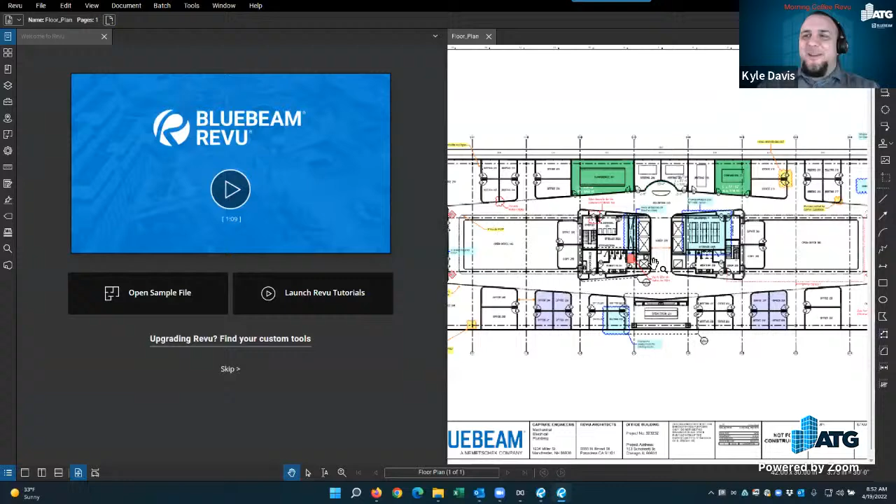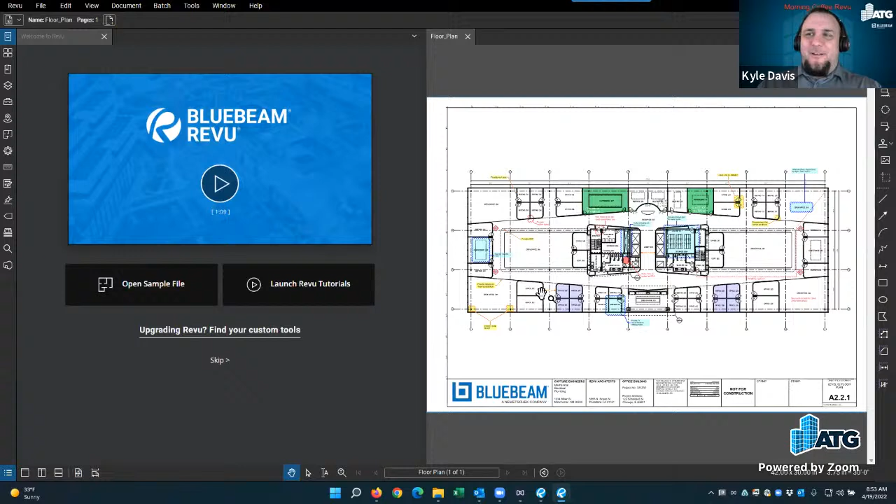It gives me some things about printing and Revit stuff. I also use this for showing how to create spaces in Revu, and when I export it out and things like that. That's pretty cool—where can you get it right here?

Actually, if you hit Help, Welcome to Revu—so even if I have that closed out, press F12, and you get this. Oh hey, I didn't notice that. Good eye, I didn't notice that. F12, there we go.

All right, the Revu desktop shortcut—if you want your desktop shortcut right there.

However, if you're like me, if you look at my desktop here, I got nothing. How do you do that? That's amazing, I just have my recycle bin. So clean, that desktop. Yeah, I actually do a lot of demos, and I do have files off of my other screen, but it's only three. So I need to take some notes from you, Kyle, and fix my screen over here. I put everything on my external hard drive and have shortcuts to it from my desktop. I like that—David Clark, clean desktops are beautiful.

Then there's the stapler desktop shortcut, that's if you want to pop up the stapler, which otherwise is in the menus. If I could spell correctly—I haven't typed it in forever, so it doesn't even remember it's there. Right, so the Bluebeam stapler—all apps, Bluebeam, and then there's the Bluebeam stapler. That allows you to open up and convert things to PDF or combine files, things like that.

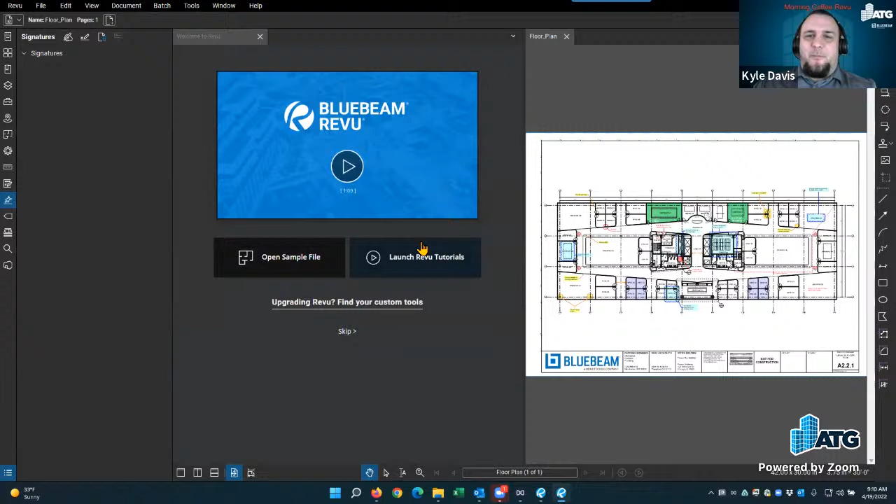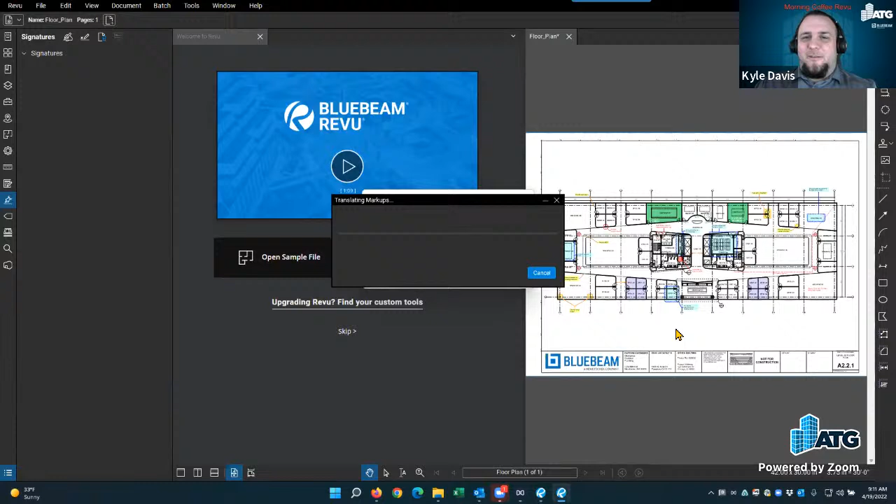What he did here is if you click document and you go down to translate markups, you get the ability to do that. And as Doug just mentioned, powered by Google. Look at that. So I can come in here and let's say I want to translate to Spanish. And so now I have the ability to look in here, all these markups, and you can get them translated into that language. Now, I'm actually going to cancel it because I don't know how long that's going to take. But there you go. Cool, though.

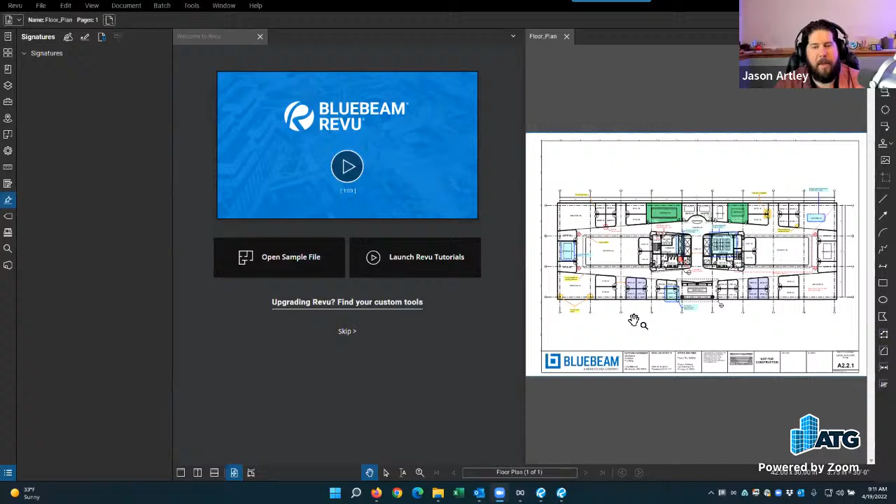Oh, so Doug had a set in Cantonese once. So yeah, that would be fun to play with, and it adds to the global accessibility too, right? Cool. We should play with that sometime. See, we're always learning something new here at the Morning Coffee Revu. I know. Or to mess with coworkers, even better, David. Yes.

All right. So again, these are just plugins. These are only available in CAD and Extreme versions. So if you have standard, you won't have the plugins available. Interesting that the LT is on there. Yes, I was wondering that too in regards to AutoCAD LT. Now, Revit LT is not listed here, because Revit LT never supported third-party plugins. AutoCAD LT was also supposed to never support plugins, but according to this, you can put it in there.

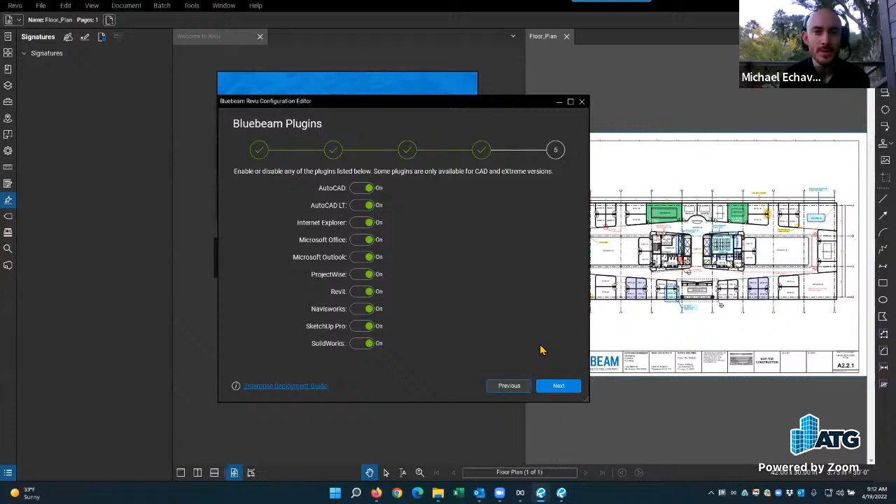So I don't have AutoCAD LT installed, but I do have a license for it. I want to test that out because I've never had AutoCAD LT be able to accept add-ins. So if Bluebeam can do it, cool. Yeah, and it could be that they got a special exemption in that it's a PDF writer. Well, and AutoCAD doesn't go into the add-ins. Remember, it just goes to options. So maybe that's why. I think it's an output tab. I think that's what it is in AutoCAD for Bluebeam, output.

Okay. So next over, and then you have the output deployment folder. So this is where, back from the original location, you can change it later. So two locations. Then there is the skip pending reboots. This is if the installer detects a pending reboot, enable this option to skip it.

So basically, in Windows, a lot of times if you install Windows updates and you haven't rebooted yet, those are still pending updates. So Windows says, hey, I need to do something. So sometimes it prevents an installer from continuing because it already has these other things. So this lets it skip it, install it, and then you need to reboot afterward to not only take care of your other updates, but also for Revu to finish too.

And then the other big one, silent install. Do I want to see a dialog box that gives me all these buttons I have to click next on, or just do it? So silent install is the option to say, go ahead and install it. You still get a dialog box, but it just shows you a progress bar. So it shows you what's going on versus it popping up and you having to say next a couple of times.

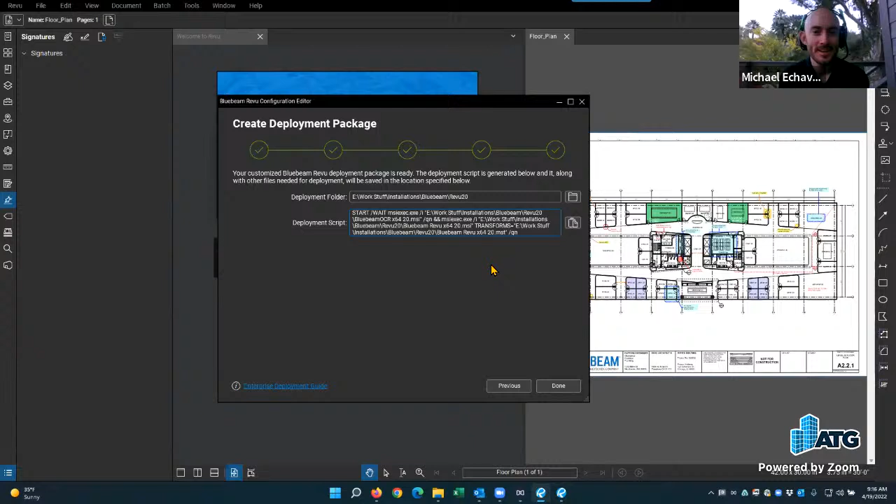And by the way, before this deployment package came out, you used to have to do this manually. Yes. So this is a lot easier. This has everything done for you. So if you're one of those folks that hasn't done any script lines for deployment packages, this is the best way to go about it. You don't have to worry about messing a 0 or a 1 up, because we've all been there before, and it will preset everything for you.

Yeah, when I first got into Bluebeam software, working on the support side, we had to go in and edit the MSI. So we had to have a tool that let us edit the MSI and change all the keys in there: here's the serial number, here's the product key, here's where I want plugins. And just as you stated, you could easily miss it, oops, should have put a 1 here and I put a 0 and didn't see it. And then you have to go back through and do it again. So, make life easier on IT.

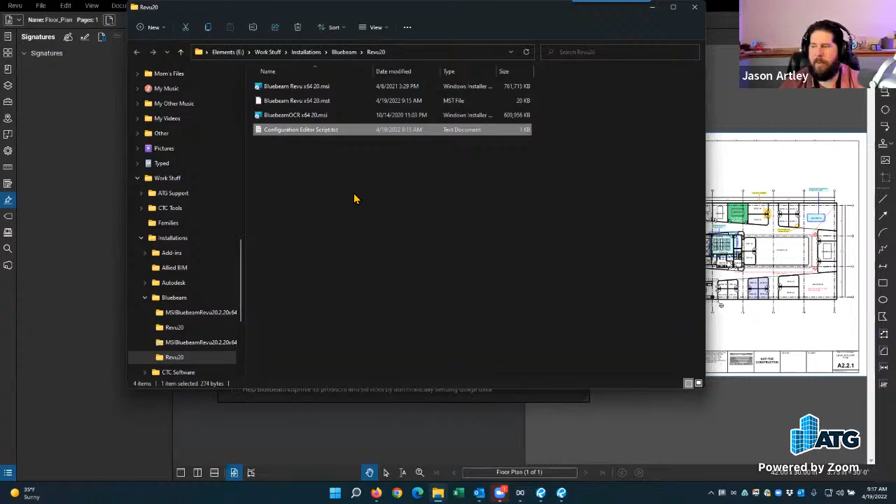Ooh, so Michael's suggesting it writes the script out. You just need to change the file extension to a BAT to make it a batch file. Right there. So when I hit done, it took me to that folder, and then there's the file right there. And it's just simply, by default, it creates it as just a text file. But if I double click on it, all it's going to do is open Notepad.

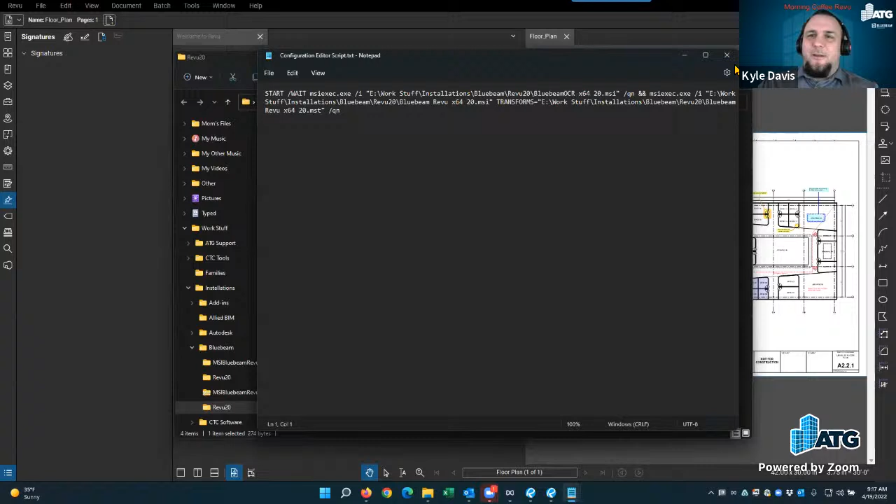So just as Michael said there, if I right click on this and say rename, I just need to change this to a .bat file and say yes to convert it. And then now I can use that as my install. If I double click on it, it's going to start executing that command.

Or you can put this in a deployment software. I can say SCCM or PDQ or any other deployment software, as long as they support your BAT files. You can just say, point here, grab this file, go. And that's it. There shouldn't be too many other edits because this editor already did it for me.

And we're not done yet, because all we set up there was preferences. Most folks are probably wondering, because we know more of the front end of Bluebeam Revu, which is profiles. What about tool sets? What about all of those other items like line styles? How do we add those, Kyle? Yes, so let's go back to the configurator, and we now have other options in here, such as deploy extensions. So here with the deploy extensions, we can push out custom profiles, tool sets, and more.

I'd like to think it should be like a commercial here. Wait, there's more. And that's not all.

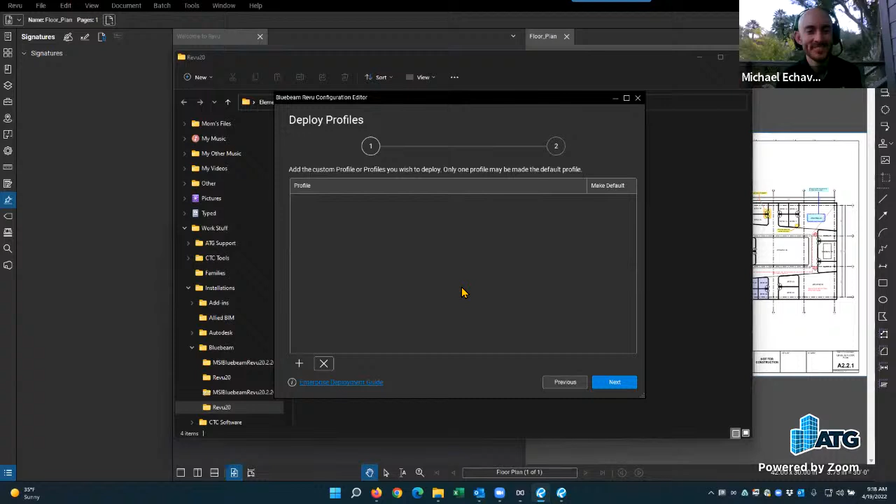So here is where you can specify what other things that you want to deploy, such as profiles. So here I can say add, and then I can specify my BPX file. So I can navigate to where I have that saved on the server or wherever it is, and I could put that in there. And then I could specify as many as I want, and then over here I can say which one is defaulted. So by default, make this one the primary, and the other ones are just in there available to use, but they're not the default. And as up here, only one profile could be default. Never heard of the ability to make multiple profiles defaults in any software.

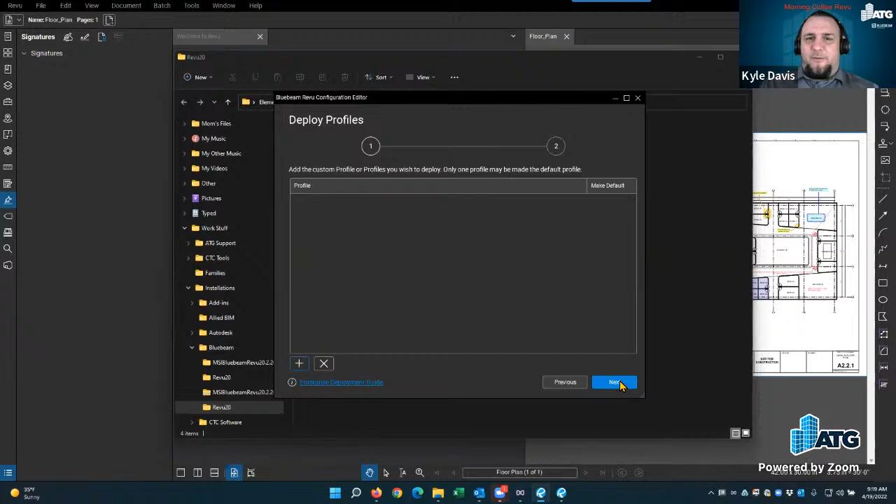But if you're not doing deployments of profiles, or even if you are, if I go next, now I can go to specify tool sets, hatch patterns, and line styles. So again, I can come in here and hit the plus sign, and I can browse to my tool sets, hatch patterns, and line styles. And you do have to hit the drop down here and select which one you're trying to browse to, because they are different extensions, BTX, BHX, and BLX. So you have to do that, and there's not one in here that says just hit all 3 of those. So you have to make sure you're specifying which one there.

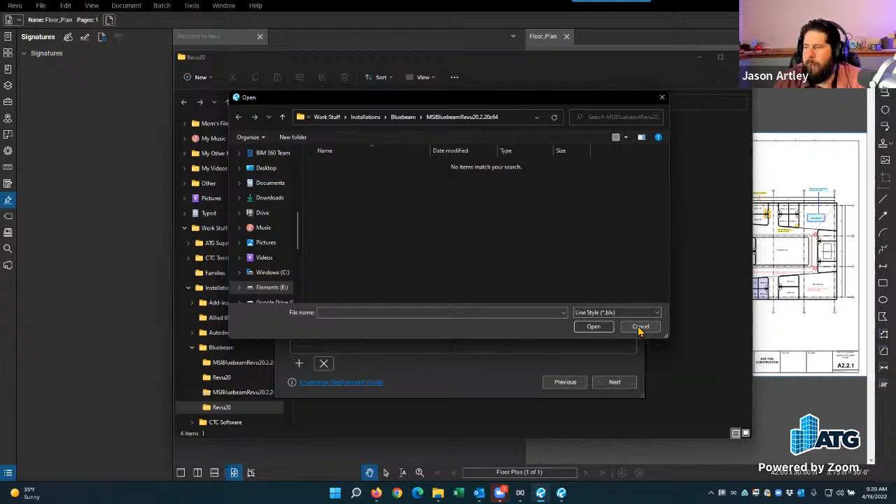Ooh, all right, two good comments at the same time. If you export your tool sets in your profile, then add tool sets in the deployment, will you get them in there twice? No, it wouldn't get them in there twice. It would append. It would take the tool chest, I believe, of the last executed task, and I believe the last executed task is here. So I believe it does profile first and then the tool sets. So if you had the tool chest in your profile, then you did your tool chest, it wouldn't put them twice. Oh, it has put them in there twice for you.

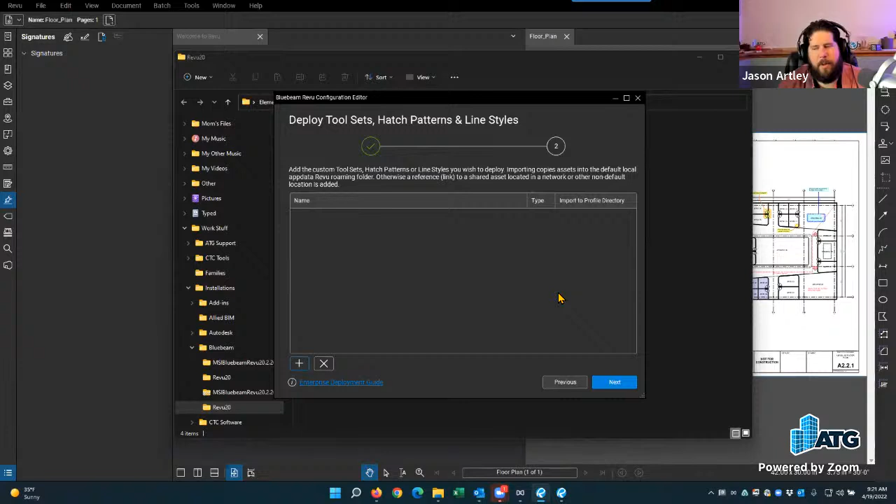That was more of a statement than a question. Interesting. Yeah, I didn't think it would do that, because typically it will ask you to overwrite or not overwrite when adding the same one in. And it could be a bug in the deployment that it's going to do it twice. If I manually double click on a tool set, if it knows it's there, it's just going to replace it with what I have. But the deployment, maybe it's built slightly different where it is putting it there twice.

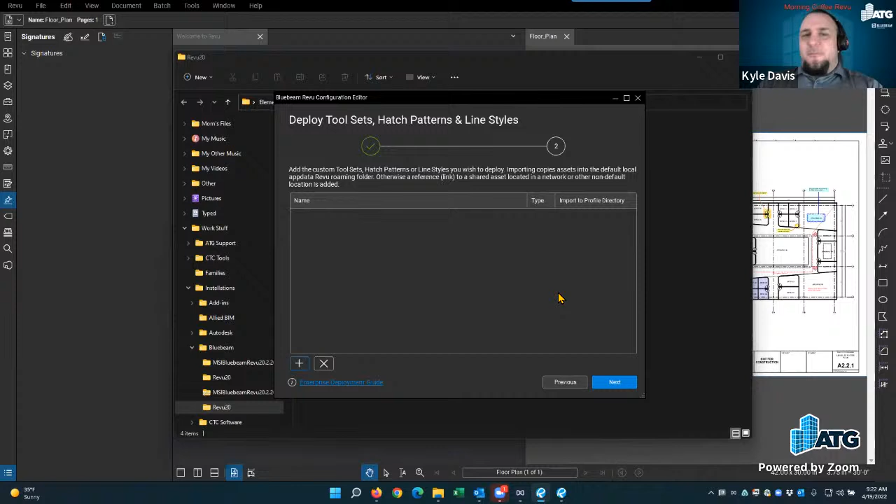So in those scenarios, I can get that over to Bluebeam if I can reproduce it, and say, hey, this doesn't work this way. Maybe we can change that feature. But as for now, don't add your tool chest in the deployment if it's in your profile. Yep, because automatically it'll come with your profile, as well as all of your other items too, as long as you're selecting the attached dependencies. So be aware of that.

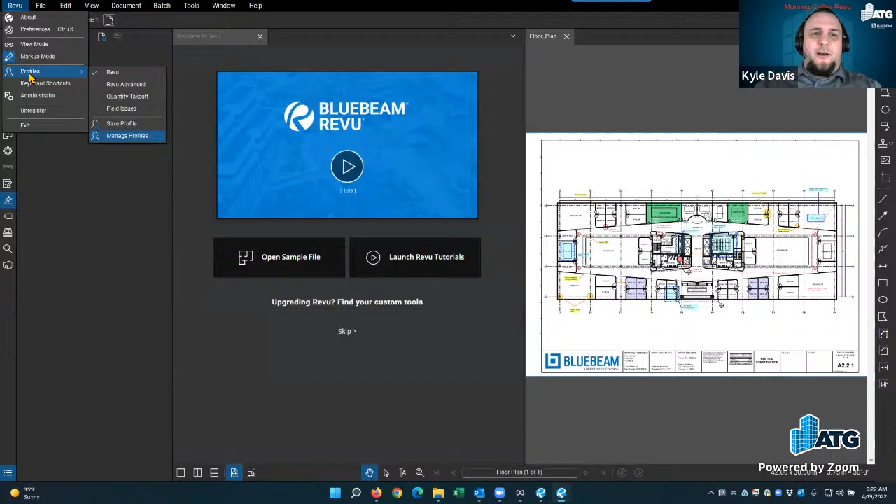Yes. So if you export your profile, if I go to the profiles and I manage these, it's that checkbox right there of include dependencies. So if that is checked and I export it, the tool sets that are associated with it will get exported as well. If you didn't export those, then that would be in the deployment here where you can specify those as a separate line item to install.

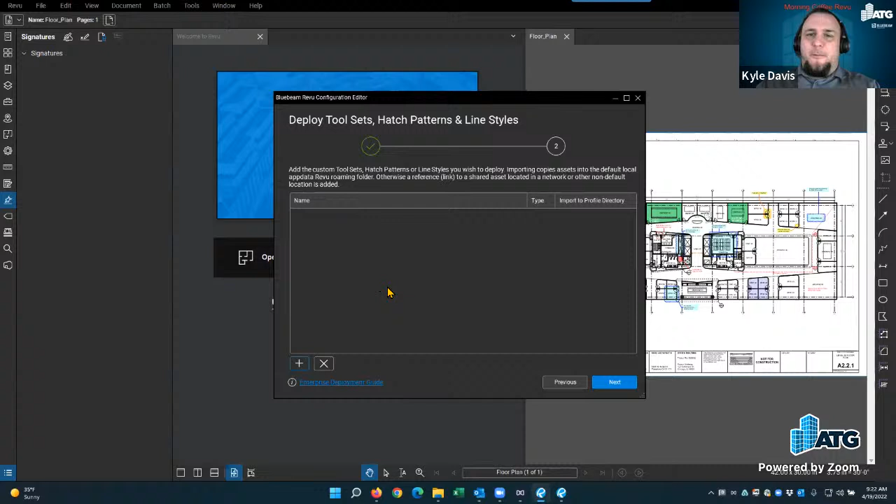So, okay, two other questions, one from David. Can you have it prompt to select a profile when it's launched? So like when Bluebeam launches, when you open up Revu in the morning, have it prompt what profile you want to start with? I've never seen any kind of setting like that. I know just in here, this is where you make default. I've never looked into having one where it pops up and says which profile you want to use.

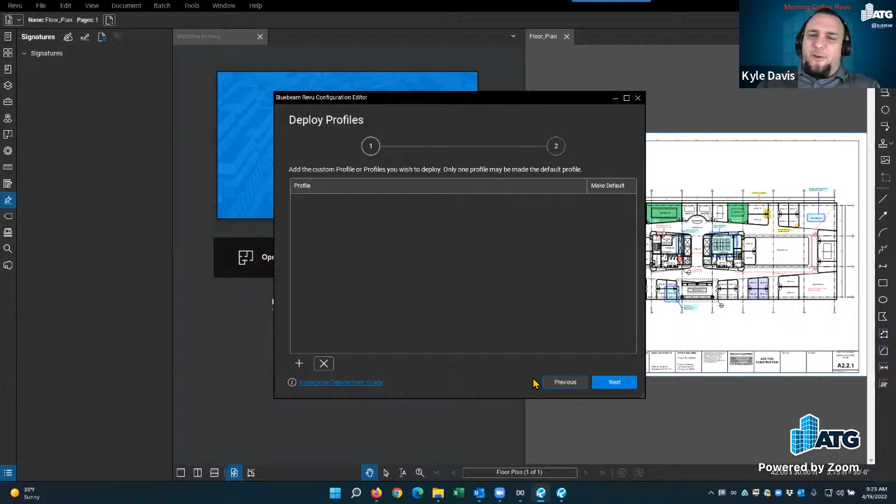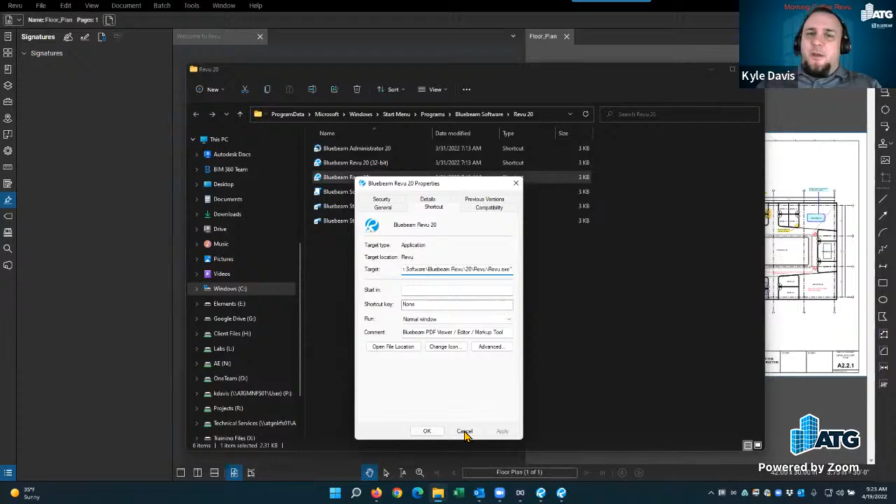I don't even know if it could be done in the shortcut as well, like AutoCAD. I know you can. Yeah, I was just thinking of the shortcut; you can do that, but I don't think Revu has that feature. But definitely, I can look into something like that, because if I go to the properties of this, let's see, go to properties. Yeah, all this does is just execute the Revu exe. So it doesn't have any kind of switch in there. So that would be a good question. I could definitely look into that one. I don't know it.

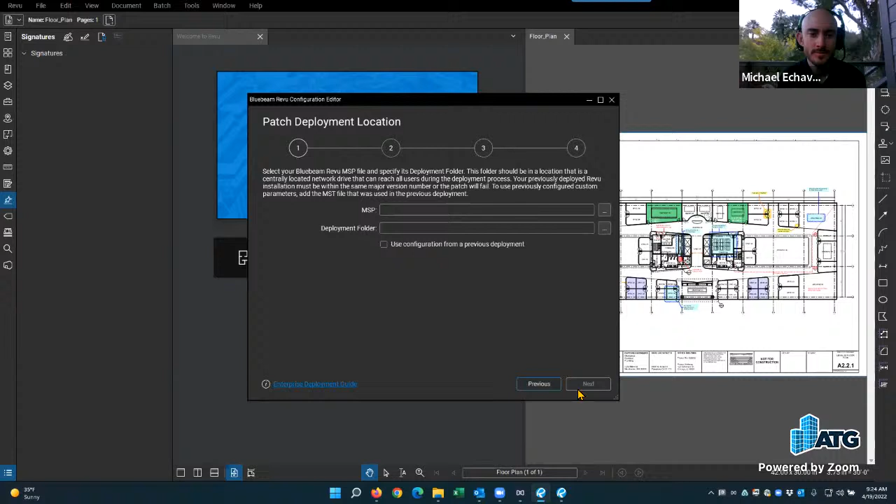Okay, another question. What happens if you update a tool set? So if you've already done your deployment and you update a tool set after the deployment, can you run this thing just to give everybody the new tools that have been set up in a tool set? That's a good question. You could run it as a patch if you wanted, but I think the best way would probably be just to send it out, to be honest. Yeah, typically what I see is to just send them the file format, and then they double click on it and it imports it and overwrites their profile and/or tool sets.

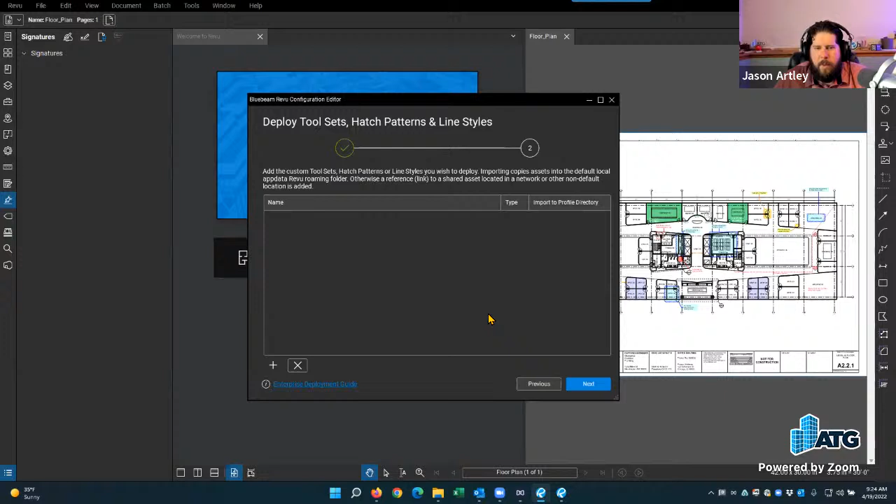Ooh, that'd be a decent trick. When we were talking earlier about having Revu open to a default PDF, you could have your company dashboard that would have your new tool set right there to update. That is true. You could attach a PDF. Oops, sorry, Michael. No, you're good. Yeah, you can attach a PDF, and you could create a digital dashboard in Studio Projects, and then Projects is going to be your live location of where you add things, and it links directly to that location.

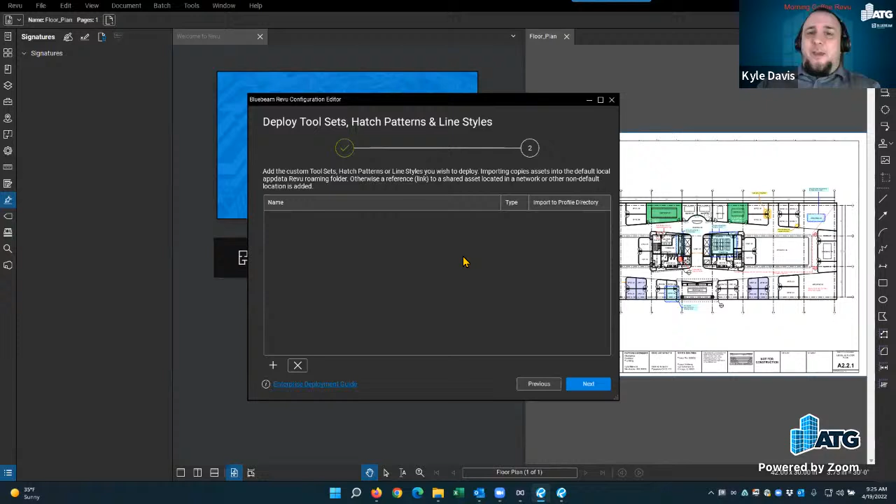Yeah, and in that PDF you can edit it to say tool chest updated on this date, click this to update yours, and so the users can click on that link, pop up their new tool sets, and import it. So that's a really easy, good topic for folks who have iPads too.

Yeah, and here's the question about statuses. So there is currently no exportable way for custom statuses unless it's in the profile. So you'd have to update the entire profile. So yes, statuses come with the profile as long as you have said save to profile, because by default it saves to the PDF. And we found this out too. I always thought that you could set a profile and it would save it so you can add it in a session, but it's actually just the PDF that saves those custom statuses in order for you to get them into a Studio Session so everyone has the same one.

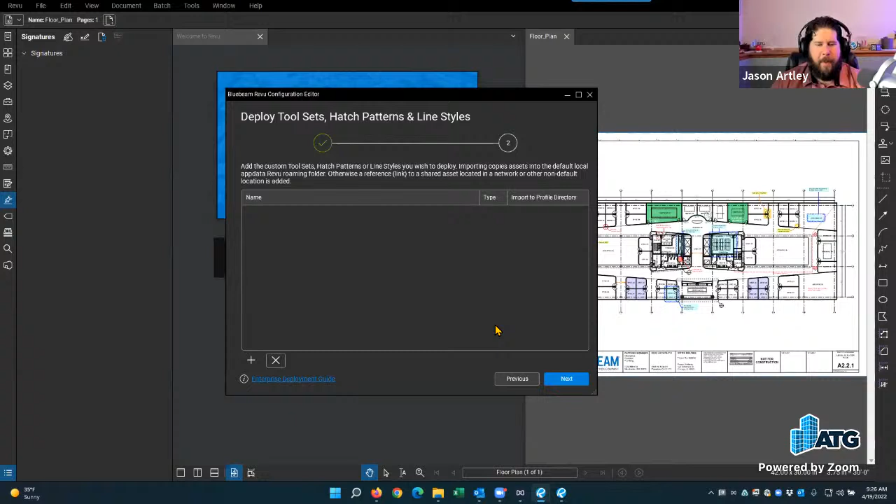So, all right, I haven't done much here, but this is where you're just going to specify the profile folder location: default or designate new profile directory. If you turn this off, it's going to keep whatever was there and import the profile there, or if you turn it on, it's going to specify a designated new profile directory. And then silent import, so it's going to import those elements silently. So let's specify my folder here again, even though I haven't done anything, and then I just say create.

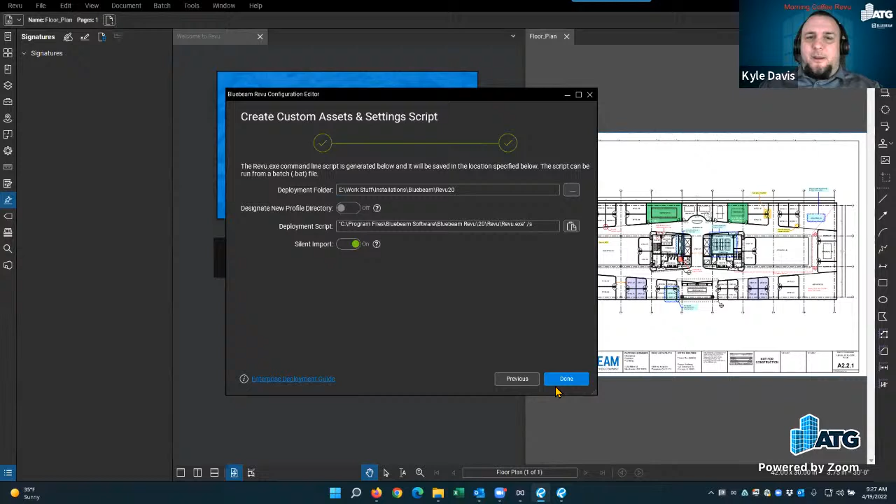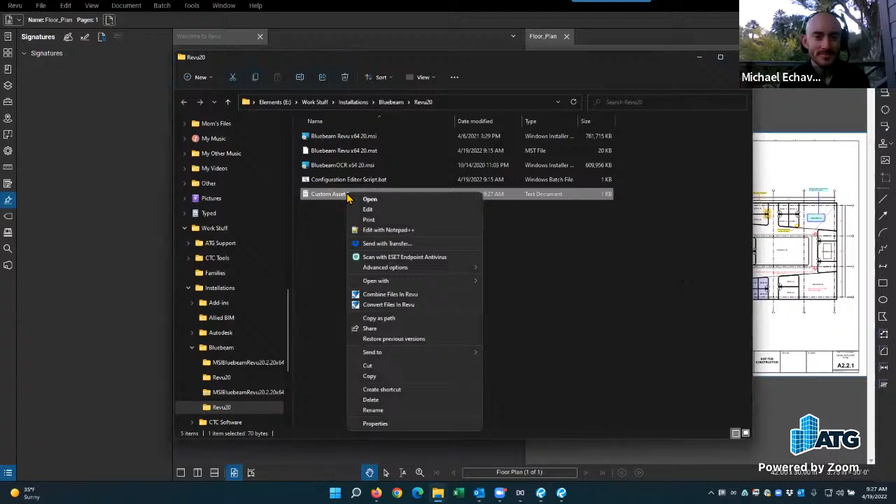And so now it's going to have that other deployment here of just simply custom assets. So now you can have the configuration editor and then there's the custom assets. So this could be done separately. It doesn't have to be done at the same time. You could do these one at a time. So I can say, hey, install Revu, and a little bit later I can then say, push these assets now. So I can go in there and update that and do it. That'd be the same thing. You could turn that into a batch file, put it in your PDQ or whatever deployment software, and then everybody's up to date. Yeah, and I believe I could also come in here and just take this line item also.

Oh yeah, again, I didn't do anything. This is just blank because I didn't specify any profiles or line styles. So this is all the code is, but I could come in here and add this to this extension as well.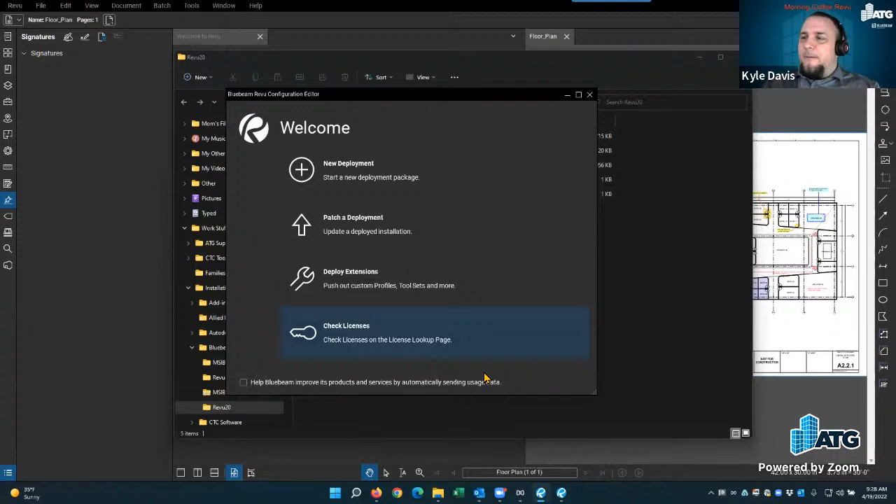Oh, so question from Hector: where is the Revu configuration editor? So that's a software that needs to be downloaded from the website. I'll put that link in the chat there, Hector, so you can download that installer that Kyle was walking through today.

Yep. And also, under that link there is the ability to download it, but it also has very detailed instructions on how to do it: the system requirements, the administrator guide running through the configurator, the enterprise deployment package. And I believe when I go to this, it's basically the same thing.

So Michael has a question: are we going to talk about the batch uninstall file? Is there a particular question you have regarding the uninstall file? Are you talking about the uninstall of previous versions or uninstall of whatever Revu is installed already? Previous version. Okay, yes. I thought that might be where you're going, but I wanted to clarify.

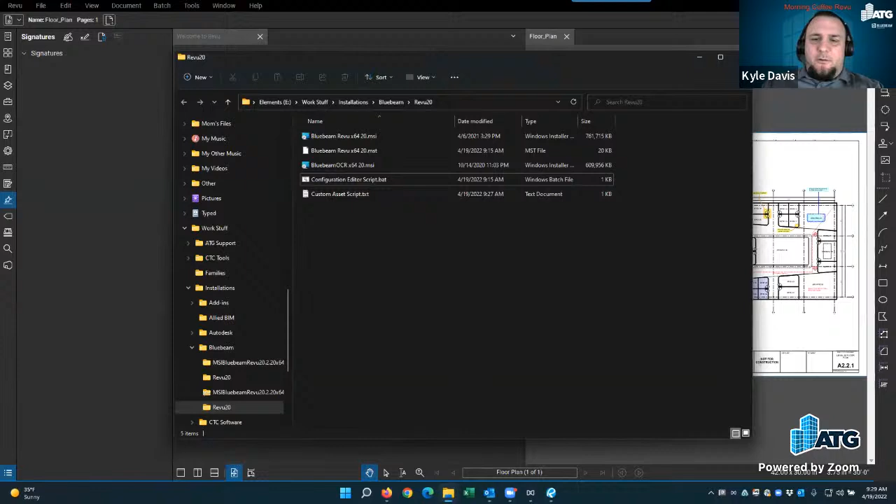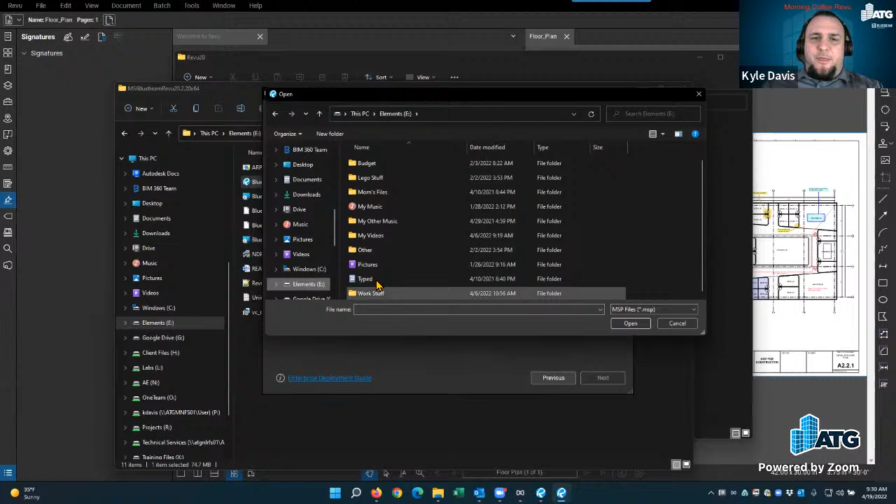So under the MSI package, I can't remember. Now I've got to bring up the configuration editor. I don't recall. Typically, it's embedded in the traditional MSI file. Correct. Let's see. Let's update this one because I want to look at my setting, because I thought there was a setting in mine that said something about it. Where's my package? Okay. All right. Oh, here is the uninstall previous version.

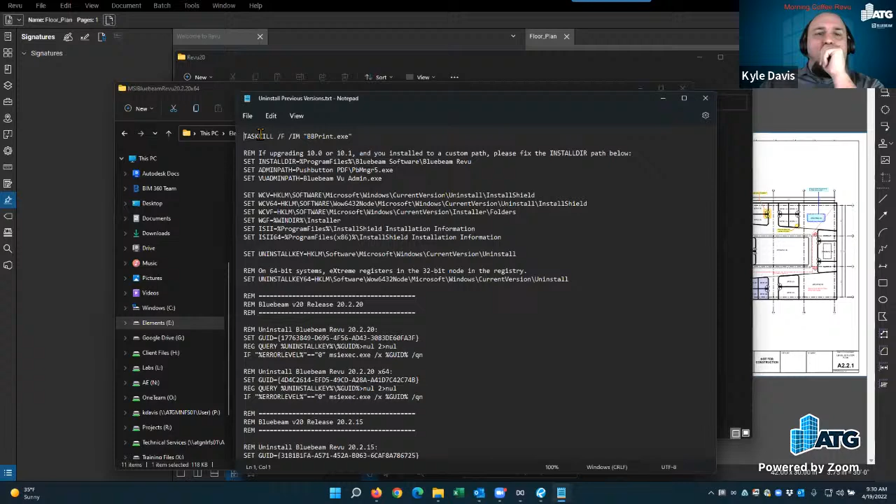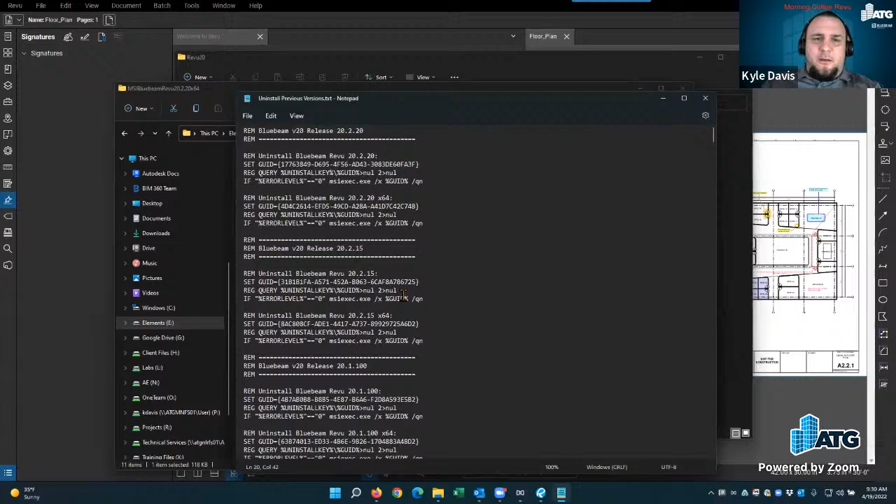So right here, this came with the download: here's the script that can be run. You can just convert that to a BAT file, but I don't recall where I can put that in the configuration editor to specify that. But you can run that and then run the other MSI install as well, so that it uninstalls the previous version.

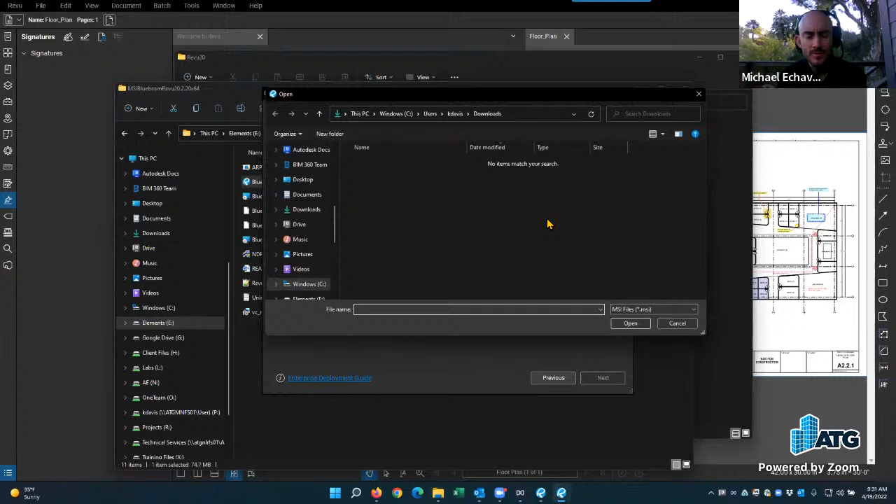Yeah, I thought the traditional MSI executable file points to that first, doesn't it? In the script, it goes to the uninstall text file to run the uninstall before it installs. Oh, in here? So in the traditional 64-bit executable, it points to that text file to uninstall first and then runs the install. That's usually what happens.

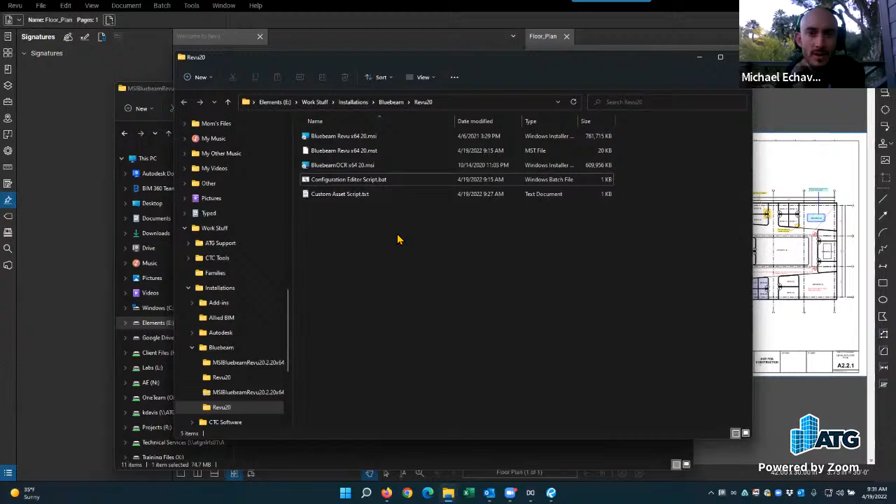And that's because when you first install Revu, it asks you, do you want to run side by side or not? And when you say no, it then points to that uninstall file and uninstalls the older version. Yeah, and I may have gone in here a little too quick, because I did want to say there was something in here where you could specify whether to do that or not, and I may have just missed it. So I'm just going to put that on my desk now.

We are over time today, but as we wrap up, this goes back to where we started: end of life. If you are looking at the new version of Revu coming out this July, or getting all of your stuff up to date from 17, 18 or 19, because those products are being set off to the sunset, hopefully this conversation with Kyle was beneficial to get your wheels turning. And if your IT folks are struggling, send them a link to this video.